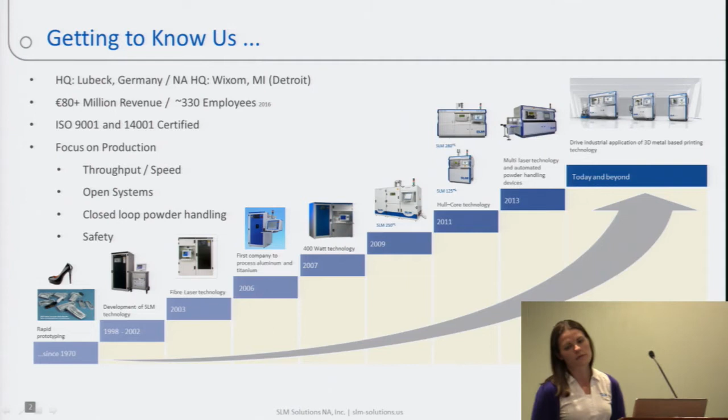So I'm just going to give a brief presentation about the metal additive manufacturing process. I'm going to touch on a lot of the same points that have already been made this afternoon. So again, just a little bit of background about SLM Solutions. The earliest incarnation of the company dates back to the 1970s. We've been working with metals and manufacturing for about 50 years now.

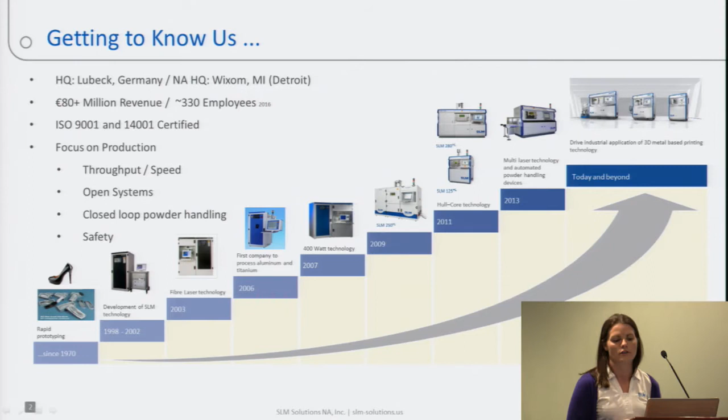Dr. Dieter Schwarze is one of the pioneers of the selective laser melting technology. He works with us over at our German headquarters in Lübeck, and we have our North American offices in Metro Detroit, where we have a full team of applications engineers and service engineers to sell our selective laser melting systems.

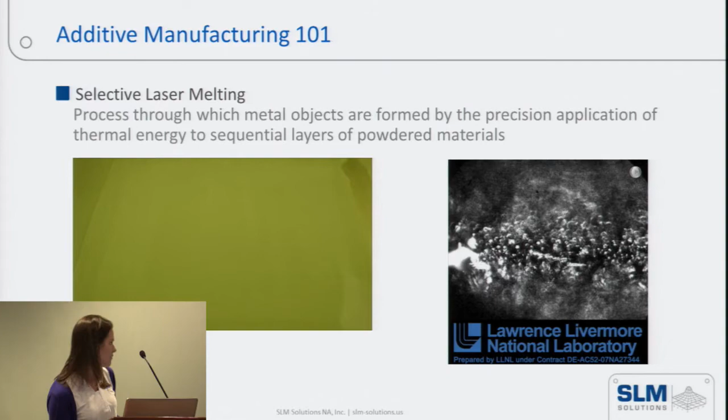Oh, no, that button. So I think these will, oh, no. How do I get the videos to play? Oh, they are playing? They're not playing on my screen. Click on the image.

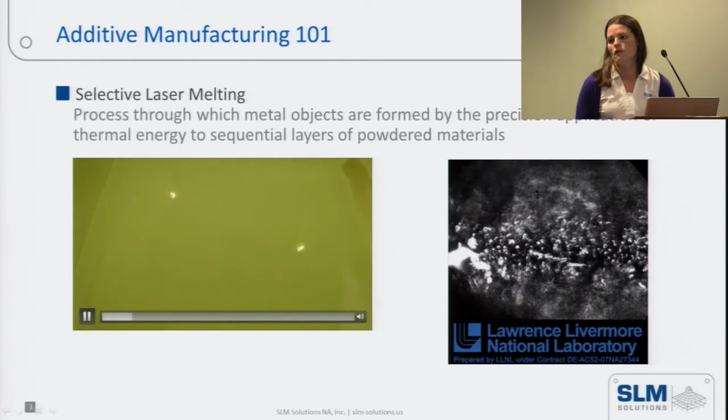There we go. Okay. So just some basics. Hopefully everyone's familiar with the powder bed fusion process. If you're not, that is a real-time video of it playing over there on your left. That's on our 4-laser SLM 500 system. And then on the right is obviously a very much slowed down video from Lawrence Livermore.

The video on the left, everyone says, ooh, that looks really cool, looks really fancy. If you look at the right, if you're trying to go into production, that video might cause some panic because this doesn't necessarily look like a controlled process. So trying to understand why that spatter is happening, what kind of effect that has, all of that is necessary for when you're going into production.

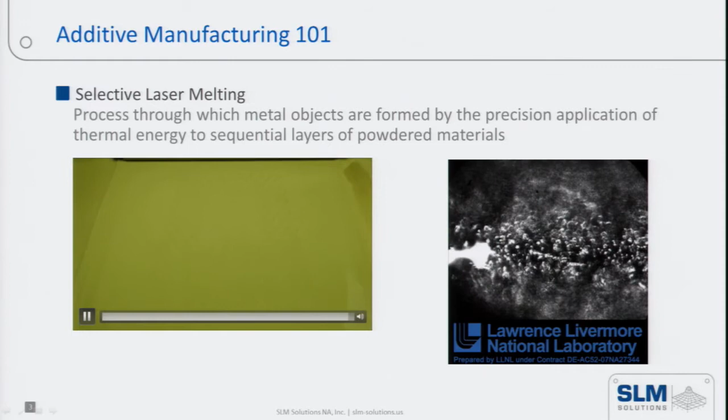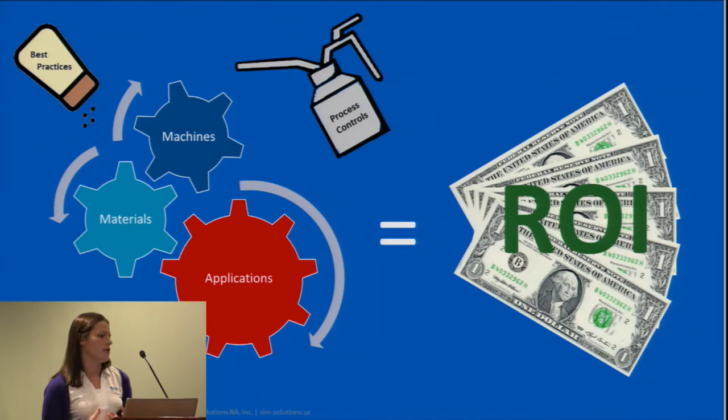And so there's lots of things. As much as I'd love to tell you, if you buy an SLM system, you're going to go straight to production, that's not really the truth. The machine is only one part of the equation. You have your machines, which drive your materials, and your materials drive your applications, and ultimately having the right application is where you're going to see your return on investment with additive manufacturing. So this isn't necessarily a plug-and-play technology. You really need to have all of these things to make sure that you're utilizing additive manufacturing effectively.

One of the unique things about SLM systems is that they are open parameter systems, so you can get a standard set of parameters for each material, but we're completely open. You can fiddle with these, for better or for worse sometimes, but we do have that full team of applications engineers. We have a PhD metallurgist on staff who absolutely loves when you come to him with these types of issues, how to adjust your parameters. He geeks out about it, and so these are some of the things that you can adjust on our machines to really hone in on your particular process.

Your build rate is the result of your scanning speed and your layer thickness. Those are also adjustable, and so just as an example, a standard aluminum on an SLM single 400-watt laser system is about 35 cubic centimeters per hour. And then one other thing to take into account is your gas flow. One of our latest machine upgrades really gives you a much better uniform gas flow across your chamber.

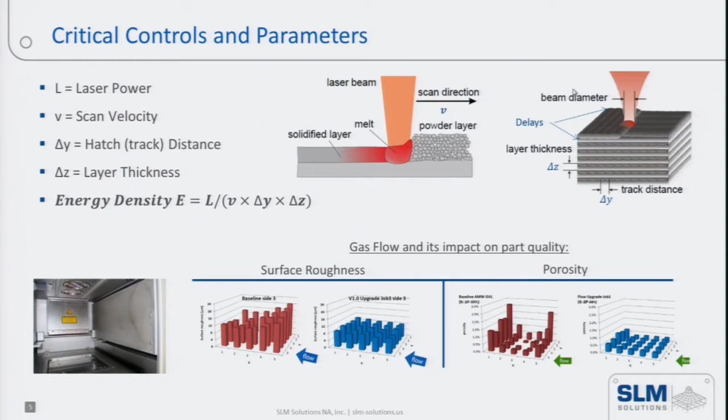You can see from the charts there the surface roughness and the porosity. In the earlier versions, when your gas flow wasn't quite as uniform, you weren't getting the same quality results across the entire build chamber, which, if you're going into production, is absolutely horrible if you're not getting that consistency and repeatability. With the upgraded gas flow system we've installed, clearing out all the soot from the chamber gives you a much more efficient and repeatable process so that all of your results are the same.

That same PhD metallurgist loves the saying, the metal never lies. So you can make parts that look great, but if the quality isn't there, if your microstructure isn't there, it doesn't matter, especially if you're going into production. For production, you need that repeatability and that transparency.

And the OEMs are slowly starting to catch up with that with various quality control modules such as melt pool monitoring, layer control, laser power monitoring. All of those modules are being built into the systems these days to give you that transparency so you can see if something went wrong, where and why, and then be able to correct it for the future.

And again, SLM as a vendor is actually proud to not drop the machine and abandon you. We have that crew that will help you with your best practices, your standard procedures for your facility and your process.

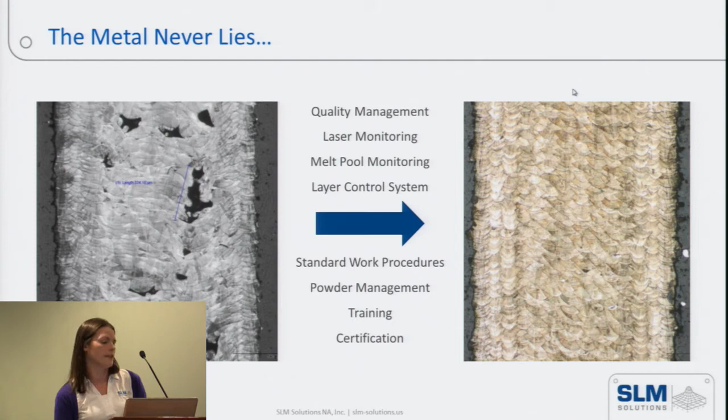So when you have your machine taken care of, the machines feed the materials. So what materials are available? You see the standard list up there of your weldable powders. All of those you can purchase from SLM Solutions, and we will give you the parameter set, plug and play, off you go.

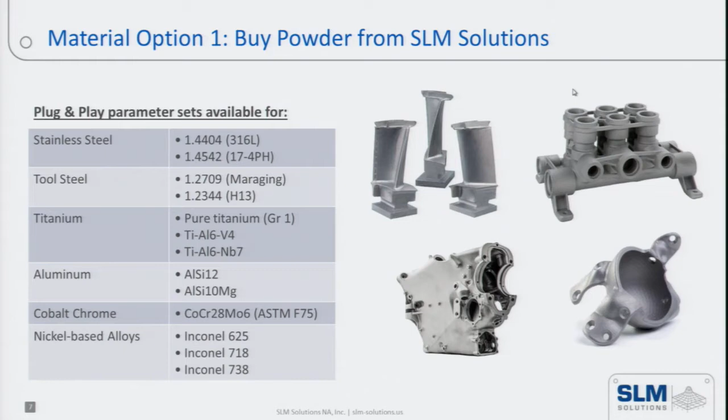Unique feature to SLM, there's option 2. It's an open source for powders. So you can get them from any third-party system, source them locally, source them cheaper. We don't care. We generally recommend a certain quality as far as humidity goes. Make sure your micron size is correct so that it'll flow with the machine. But beyond that, go for it. Find yourself a new powder.

We have a development module that will allow you to test the parameters, tweak them. If you're building 20 parts on a system, all 20 can have various parameters. So afterwards, you can cut those off, test them, see which set of parameters is best for your process, and really use that for your competitive advantage. And once you start getting into production, those are the fine things that are really going to start showing you the investment when you have your IP, your process defined specifically for your application.

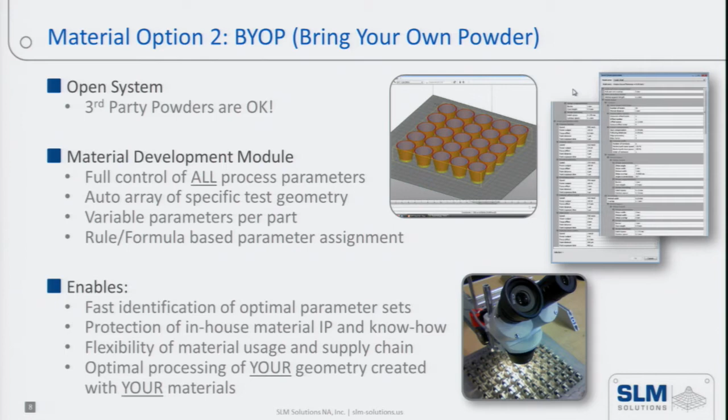So then if you have your materials, you need to apply it to that application. So what applications are best for additive? We've been through it throughout the day, low volume, highly complex parts. You need to find new markets. You see it a lot in medical with mass customization now. They're not making standard small, medium, large sizes for anything. They're making bespoke hip implants or printing one plate of 30 different dental frames, and each one is the scan of somebody's mouth so we know that it fits perfectly.

The concept of design for additive. We're not designing for manufacturability anymore. We're designing for functionality. How can I improve the performance by incorporating conformal cooling channels or lattice structures to lightweight this? Reducing assemblies, the GE LEAP engine there we've all heard about. They took it down from, don't quote me on this, 30 some odd parts to 1 part.

And then also your digital inventory, so that for legacy components, you can just print those because ultimately all you need is the CAD file. You don't need the tooling or the setup. So finding that application that really makes sense for additive. We have people come to us, they show us a CAD file. Well, how do you make this now on a lathe?

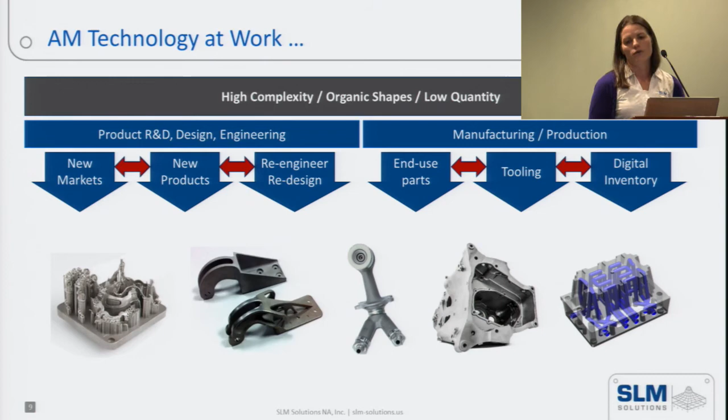We recommend continuing to make it on a lathe. It will always be cheaper and faster, unless you're going to do some topology optimization and incorporate some of those channels. Once you start getting into those types of applications, that's really where you're going to see your return on investment. So to put it all into summary, your return on investment is driven by your application. Find that right component that will work, that you can't make any other way.

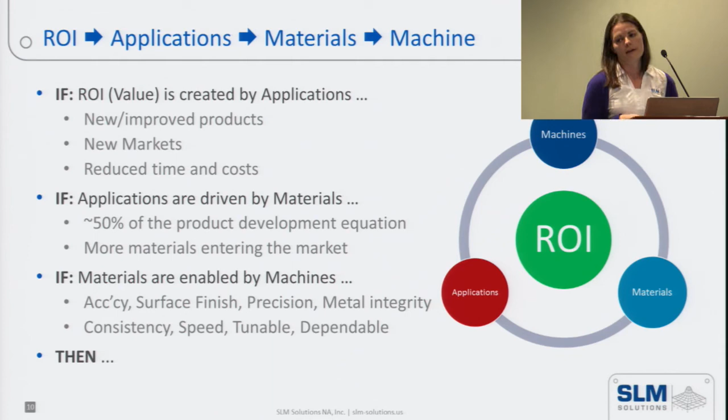You have your materials. Can you define them? Can they give you that competitive advantage? Is it cheaper to make it additively, so you don't have the waste material from subtractive? And then will the machine ultimately allow you to capitalize on that competitive advantage with the materials that you have?

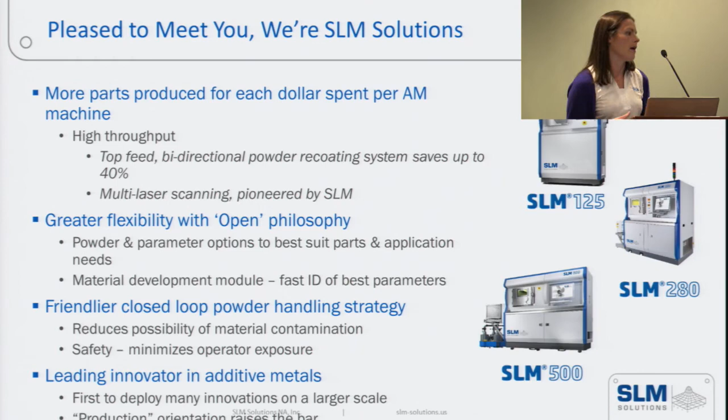We deal with selective laser melting, a metal technology, powder bed, and we're really focused on production machines. So we have a pretty high throughput on our machines from the fact that we pioneered multi-laser systems, so you can get systems all the way up to 4 lasers, and also our powder coating technology. It's top-fed, it's bidirectional, and so it cuts down about 40% of your powder coating time, which when you're doing thousands and thousands of layers, does cut down your build time.

With that open philosophy, you can really capitalize on tailoring your process to your application. The powder handling, we try to keep it all closed loop, so you limit your contamination and also the safety for operators, really big in a lot of OEMs. And we have a great R&D IP profile over at our headquarters in Germany. Like I said, we were the first ones on the market with the multi-laser systems, and we really gear these systems towards production, and that's what our team is focused on, trying to help you get to that stage.

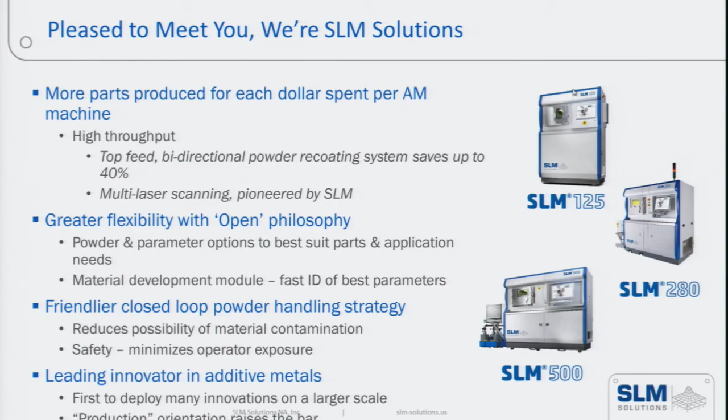So any questions for Kristal?

Does that include your service bureau? We service the machines, our service engineers who service the machines, that I don't know for sure. Don't want to promise you anything that might not be correct.

Any other questions? Are you a service bureau as well? No, we only sell the systems. We do have a full lab in our facility in Wixom, Michigan, where we do run feasibility studies and test runs for people looking into buying systems, but we ourselves don't do services. We can recommend some of our customers who are service bureaus who run the selective laser melting systems.